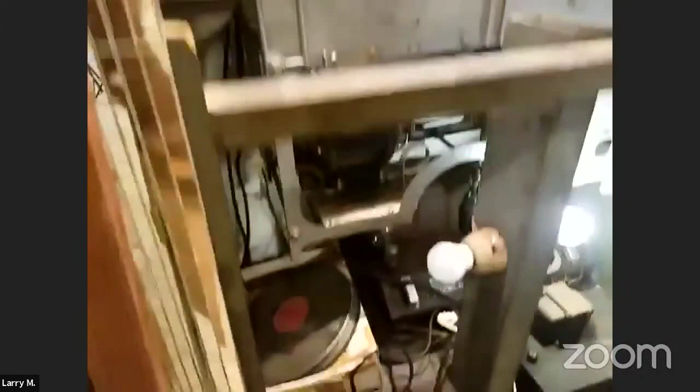All right, let's move down to the Dumont RA 101 Custom. This is an interesting set, very expensive. Comes in 3 parts: a speaker, a control chassis with the tuner and so forth, and the CRT, and it was designed to be mounted in the wall of your living room. Obviously there had to be a closet there to get in to repair it, because in 1946 sets broke down all the time. I think the set cost over $2,000 at the time.

Okay, let's move on to the next row. Other end, Larry. I might have a page missing here. Okay, well I'll direct you. Go down to the U.S. television set. Oh, okay, never mind. Here we go, gotcha.

Now, this again is the era around 1946, 47. Again, before many people had sets in their homes, but restaurants and bars and clubs, many of them had these projection sets in them. This takes the cake for the ugliest set in our collection.

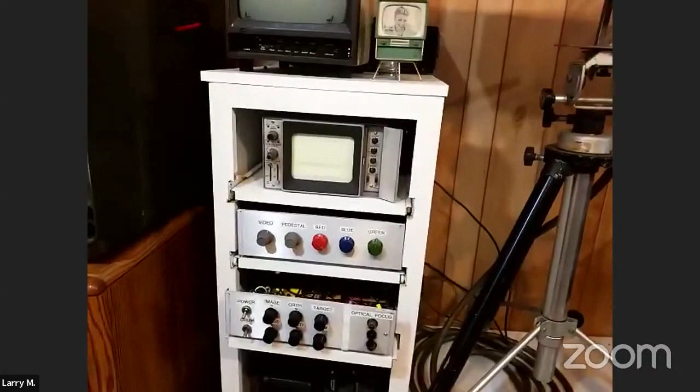We built a camera control unit for it. It also operates, and during the conventions we demonstrate - people are able to stand in front of it and see themselves on field sequential TV. We have a number of other field sequential artifacts too, but let's move down.

Next I want to show you the RCA prototype.

RCA, after the CBS system in 1950, starting around then, RCA started working on its compatible system, and there were several iterations of their design. This one is about a 1952 version of what they were trying to do.

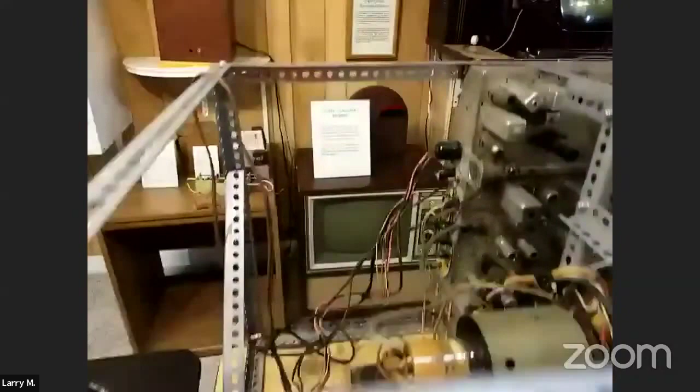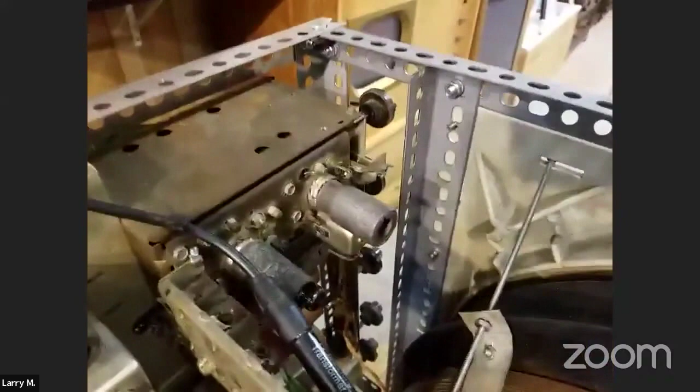This chassis was loaned to the museum by Nick Williams. He bought it on eBay, got it to the museum, and we restored it. Darryl Hock, who you'll see later, builds standards converters, and he was able to, from the documentation we had, build a standards converter that produced a signal for this. It's not the same as the NTSC system that we used - it was, as I said, an interim system. It actually produces pretty decent pictures. But by the end of 1953, RCA had moved on to their system that became the NTSC system.

Now let's go down to the CT100. The CT100, of course, is the set RCA produced in 1954, about 4,000 of them. There were several other manufacturers that made similar sets using a 15-inch picture tube. These sets produced a pretty nice picture too.

All right, let's move on - we're heading actually into the British and European room, but we sort of ran out of room in the color area. So in here is a very rare Raytheon set.

We know of only one other that exists. There's a chassis also that exists, but this set was donated by a person in Chicago. It was owned by an engineer at Raytheon. Steve Kissinger and Darryl restored this thing, and at the last convention they demonstrated it working. There's the back of it - it's a monstrosity, has an upper chassis and a lower chassis. This uses the same 15-inch picture tube made by RCA.

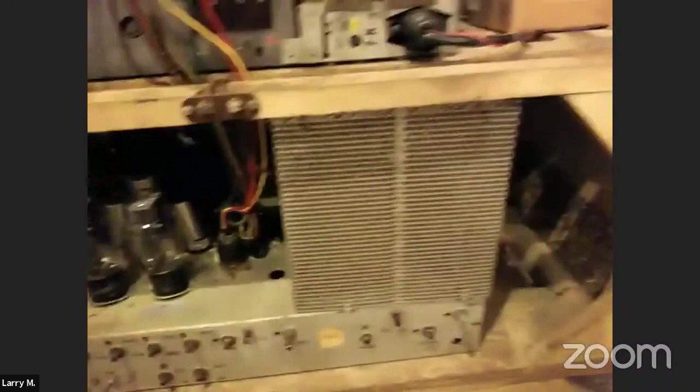Now I'm going to show you a couple of European sets that are sort of interesting. We have a bunch of them on display. One of them is this really fancy Dynatron Ether Sovereign that has a phonograph and a TV set. This is from the late 40s - really a magnificent cabinet, of course a top-of-the-line set.

And then finally, the set that is probably the most popular with visitors is our Kuba Komet. This was made at the end of the 50s and beginning of the 60s in Germany. This is probably around a 1962 model because of the screen. Interestingly, as fancy as this cabinet is - you'd think the audio section would be really fancy because it's got half a dozen speakers, but it's actually very bare bones. We haven't restored this, but I would imagine the sound is not terribly impressive.

All right, let's move back toward the broadcast equipment room.

Here are a bunch more of the color sets we have on display. And on the right-hand side up here, you'll see our picture tube collection. We have all kinds of strange and unusual picture tubes, many of them donated by Dave Johnson, a collector who passed away a few years ago.

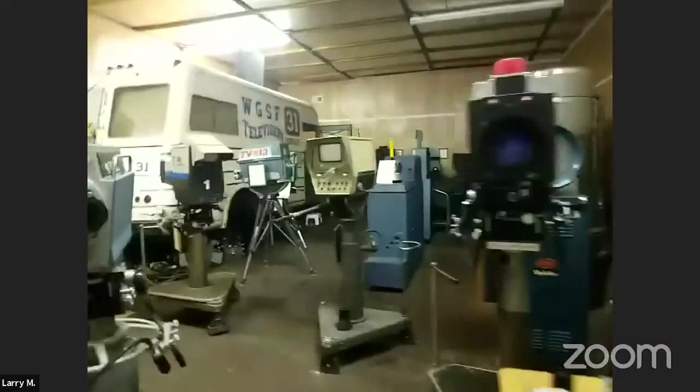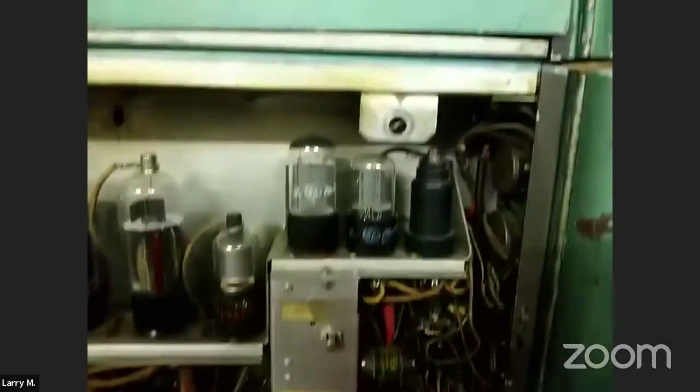Now we're entering our broadcast equipment room. I'm not going to go through everything here because there's just so much, but we have all kinds of cameras and other equipment. Here's an RCA TK31, which was sort of the workhorse of the television industry from 1946 on into the 50s. We also have a TK41 color camera, the first commercially produced color camera, but it's now being restored.

The other thing I'm going to show you in this room is our mobile van. Larry, if you could back up and try to get a shot of this. That's a pretty good shot.

This was sold by RCA to a number of TV stations, I'm guessing around 50, in 1949. This particular one was in Salt Lake City and was bought in the 60s, when the Salt Lake station upgraded, by a local educational station in Newark, Ohio. They drove it out here at a top speed of about 55 miles an hour and used it for several years for local production, doing football games, parades, and things like that in Newark, a fairly small city about 50 miles east of Columbus.

Larry, why don't you peek inside? You can see it has most of its original equipment. It had a microwave system for beaming the signal back to the television transmitter. You can see it's a pretty basic machine to drive. Toward the back end, it has the original control panel with 3 chairs: one for the audio guy, one for the video guy, and one for the director.

That concludes our brief tour. For those of you who have never visited the museum, it gives you an idea of what we've got. For those who have visited, it might be sort of nostalgic to see it. So I thank you for listening, and I'm wondering if you have any questions.

Yeah, I've got one for Darryl Hock. Darryl, could you give a brief overview as to how the RCA prototype set differed from what NTSC evolved to be?

That set was CPA — they realized that NTSC, or what would become NTSC, was going to have problems with phase errors. Hazeltine knew that PAL was the right way to go, but there was no way to produce a delay line at the time. So this was color phase alternation, where they reversed the colors just like in PAL, only on a field-by-field basis instead of line-by-line. You get the advantages of PAL, no need for a hue control, but you do get some artifacts — color fringing and flickering — because of the lower overall rate of the color alternation. I forget, I think the subcarrier was around 2.2 megahertz, if maybe Steve remembers. It was a totally different frequency they were using.

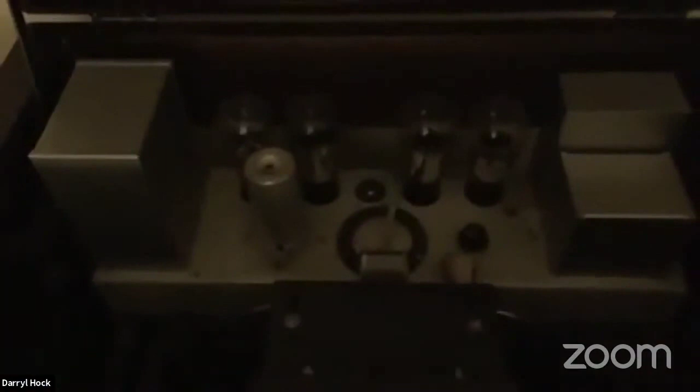So this is a fairly elaborate setup. This is the amplifier section for the neon lamp, and you can't see there's a very large GE motor in there that you'll hear when it fires up. It's loud, and then a shortwave radio chassis all the way at the bottom.

This is a repurposed RE45 phonograph cabinet from Victor that they basically just reused. If you look back here, this is where the radio originally was, and the phonograph was sitting up here. They actually just filled the holes for the original lid support and basically pulled cabinets off the line and used them for this purpose.

So let me grab the video source here. Unfortunately, I don't have it feeding around like Steve does. So let me...

Okay, you got quite a few of those converters there, Darryl. You must have gotten a good deal on them, huh? I do have quite a few converters. I don't have one on every set, so I got to carry one around a little bit tonight.

But let me get some different content for this. So now this set is running. Let me turn that off so we don't have to listen to the tone. This set is running, you can see the orange dot right now, and you'll see it fire it up.

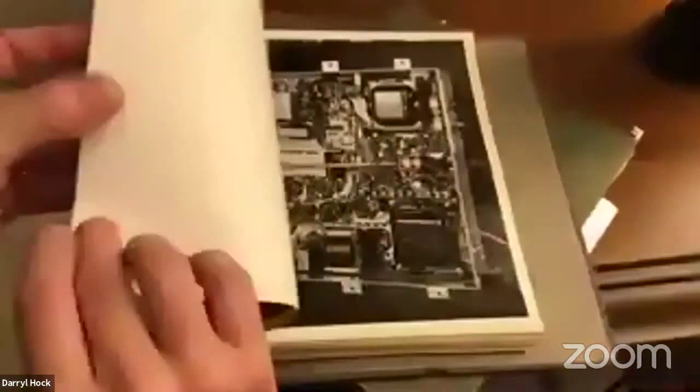Now there are some pictures in here. These are all the R359s. This is the 366, the tabletop 5-inch version, which has never surfaced, but obviously at least one was made. Let's keep going here - different 5-inch sets, power supply for the 359.

Is this one of them? Yeah, so this now is a Russian set. You can see the same Cyrillic writing. So this is one of the sets that they had made to go over to Moscow.

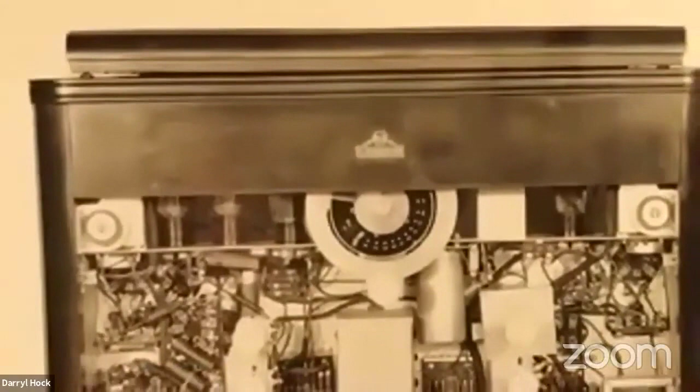All these now are the Russian set. Now it's interesting, this one actually has the meatball in Russian, if it'll focus there on it. Now the set I have didn't have that on it, and I debated putting it on, but I left it original.

I thought that would be kind of neat to have the Russian RCA meatball on there. So just lots of different flavors of the 359 sets that they had made - the 9-inch, and we'll see a 12-inch here in a second. The power supplies, different cabinets, different lid configurations.

The tabletop 366 again - in the data sheet, or the technical sheet on this one, they complained that it was getting way too hot in the cabinet and something would have to be done in production. And you can see it's crammed in there pretty tight.

And I think in here he has some of the earlier, getting back into the earlier 30s sets. A lot of these sets, at least I've never seen any of them ever surface. This is some 5-inch set.

This is an earlier 5-inch tabletop set. This was actually 1940, I believe. They were doing how low cost of a set can we make? And they actually made a version of this in a plywood cabinet that's just hideous, to really cheapen it up. But they were trying to see if they could hit a $200 price point at the time.

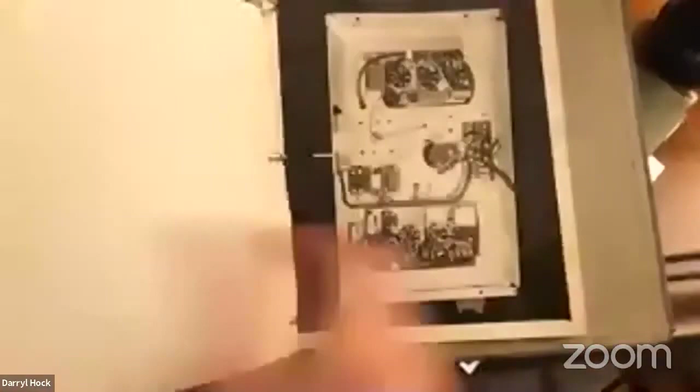So now, again, there's a couple other different - let's see if we can find a picture of a different one. This one was interesting, it's a 3-chassis set that the CRT went down through a hole through all the chassis, and there you can see it. So it goes down - oh sorry, 2 - it goes down through the chassis, and again, that's another one that's nowhere to be found. Obviously these though were made in very low volume, probably just for a 1-off, 2-off for an engineering sample.

So then over here, this is an R359B. Get this back down a little. So what they did, that was a 9-inch. The R359A was a 9-inch. They pulled them back and turned them into 12-inch sets. So they did that - it's all the same chassis. They just took the chassis out, repurposed them. They had to put a different assembly in to hold the CRT.

And you can see on this set, this is a little bit later 359B. Some of the early ones you still had all 7 user controls. This is a little bit later - they folded the width and centering on each side down inside, so they're actually underneath the deck board, because they figured that really wasn't going to need to be a user adjustable item. The other one had a continuous tuner; this one has a detent tuner in it now. So just slight changes that they made along the way.

The interesting thing about this set is this was the master set that was used to drive the sets at the World's Fair. One of the things with these early sets - there's no RF amplifier on them, so the local oscillator is basically spraying out the antenna terminals. And it's really difficult - there were quite a few service articles you can read in the magazines of the time where a guy would go out for a customer complaint about interference, and it turned out it was his next door neighbor, and the antennas were basically radiating into each other.

So what they did is they just basically created another detector and then put it through a transformer and out the back. The cans they're using are probably about 3-inch diameter and about 4 inches tall, and they screwed them to the bottom of the chassis, the two of them, just to do the modifications, and then put the extra holes in.

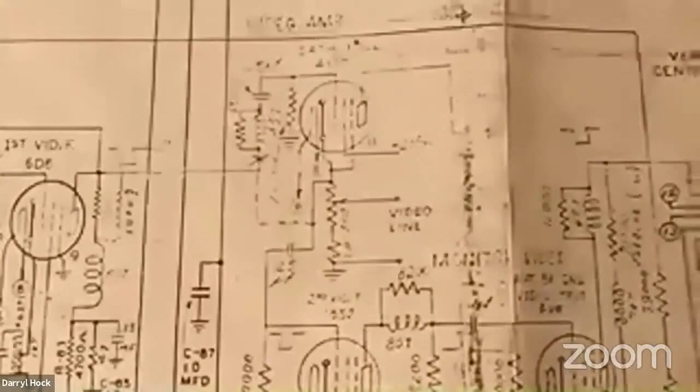So now this is where, if you get the original 359 schematic, the original circuitry is here, and they just pasted this over it. What they did is put—again, this is the preliminary 6AG7 as a cathode follower—and created the video line output to the sets. So this control is actually under the front service panel so they could set the level.

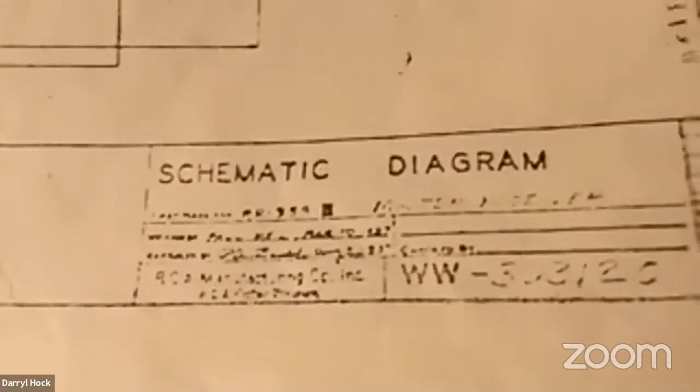So, kind of an interesting set. It's getting pretty hard—let's see if you can see it. So, master receiver, if you can see the name of it. Kind of an interesting backstory on that one. Back in the tripod.

And last, the '31 set. Some of you may know this, some may not. Again, it was found by an RCA engineer in Indianapolis. He had been working there a few years and heard about a warehouse that was getting cleaned out in Indianapolis. He went over there and saw this set laying on its side with a big piece of tape on top that said 'scrap.' All the tubes were missing out of it except the CRT, which is a prototype CRT from '31.

So he went to his bosses and said, you guys need to save this or do something with it, or just don't throw it out. Basically at the time, nobody had any interest in it. So he grabbed it, and it's survived till today.

This set was fairly well documented in a series of IRE papers, because this is the first electronic set that actually made it out of the lab by RCA. There were a couple of sets before this one I can show you pictures of in a bit, but this is the one that made it out and actually went to field testing. So they wrote some IRE papers on it, discussing every aspect of it, the transmitter, the receiver, doing field test measurements, interference measurements at people's houses where they were located, and basically just getting a lot of information on the set. It's 120 line, 24 frame.

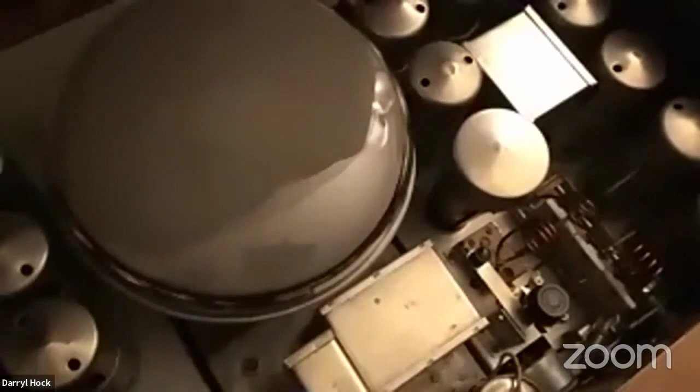No safety glass, so they weren't quite as worried about it, I guess, at that time. Easy access, since you obviously had to be playing with it quite a bit. The construction is all 1929, 1930 RCA and Victor. These cans are real typical in all the RCA Victor radios, the standard transformer cans. Some of it is unique, obviously, like the tuner section, the audio, because it's two separate. So this is the sound receiver.

This is the video receiver. There's no common IF between them, so what they did is make them completely separate. This one runs about 40 to 60 megahertz, and this one runs about 50 to 70 megahertz. They just kept them far enough spaced apart so they didn't even have to worry about interference at first.

The set runs on a single power supply. Well, obviously there's the high voltage for the CRT, but the set runs on a single 1,000 volt power supply. The reason they had to do that is, even though the horizontal scan frequency is only about 2.8 kilohertz, because of the inductances they were working with, they needed a high voltage to get the sweep they needed. So they needed 1,000 volts.

So why not use it to run the whole set by using 100-watt resistors to drop the voltage to the typical 230 volts for the rest of the chassis. So the set's filled with giant power resistors just giving off heat when you run it. It's all 2.5 volt AC tubes, except for two 10s in it. Just an interesting point, it's 54 amps to run the filaments of all the tubes on it at the 2.5 volts.

So let's go now. One of the things that the set used, and for some reason, I guess I can get into that.

Back in the summer of 2014, somebody had contacted Steve with some documentation that he had, and asked what he thought of it. Steve sent it to me, and it was a partial schematic of the prototype before this set. It used gas thyratrons for the line and frame oscillators. For some reason, this set uses Dynatron oscillators, which are horrible oscillators.

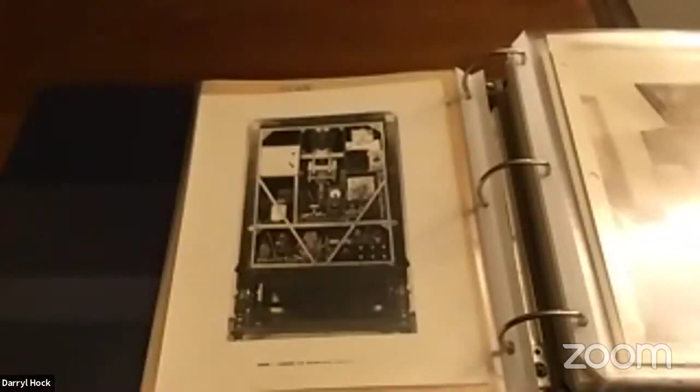So here, here's some of this, one of the prototypes that precedes this set. It's probably a little hard to tell, but some of these are very crudely put together. They were thrown together, and you'll see a picture like this one here. You can see they just used, Steve, that CPA set you look at, it's not much different than what they were doing back then, just putting something together using rack material.

But they did a demonstration in 1929. So this was all the mechanical sets. They lined them all up, a GE Octagon. Some of these I don't recognize, I don't know if they were one-offs or internal projects or whatever. So they lined up all the electronics, the mechanical sets, same thing. And then electronic set, more mechanical, the Octagon.

There's the RE45, the NBC RCA one from earlier. This almost looks like the prototype for this set, where they did it from the earlier work that Zworykin had done, but I don't recognize exactly where that one came from. And then a picture of them with their lids open.

So he was doing these presentations basically for the brass at GE or at RCA, showing them here's where we're at, here's what we're doing. It doesn't sound like these electronic sets were ever actually that functional.

They were more just laboratory curiosities that they were trying different things with. There's the one of the photocell cabinets.

Talking with his son-in-law, he was prolific at photography, a real photography buff. He had all sorts of 16 millimeter movies that I'm like, what happened to those? Unfortunately his son-in-law couldn't remember. He thinks he gave some away and threw some out. This was back in 2015, and his son-in-law and daughter were very old and in ill health at the time, which is why they were trying to sell these documents.

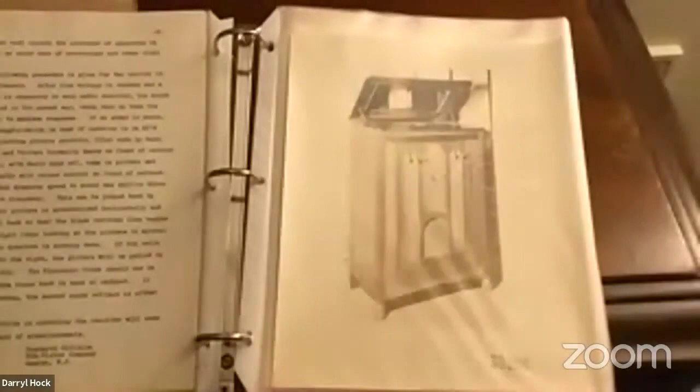Picture of the set. Again, there's no nomenclature, no markings on the set of what knob does what. But he had pictures and he labeled them all, what all the controls do on the front and on the back.

So here is the sound chassis and sound radio output. There's a switch on there marked speaker and fax. So he was, like I say, really into facsimile even while he was doing the television development. He thought, well, heck, I can use this receiver chassis to do my facsimile work.

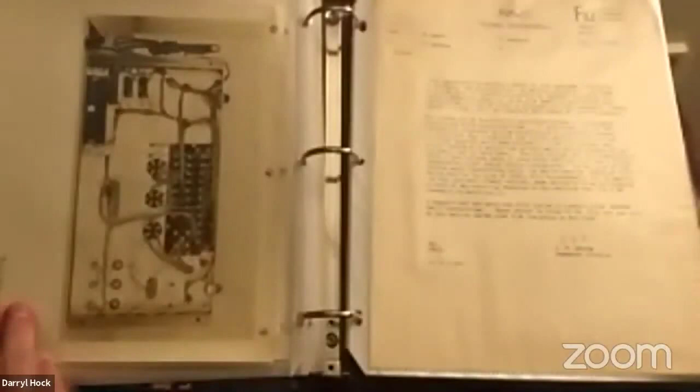And pictures of the power supplies. Just lots of correspondence between him, Engstrom, Zworykin, Kell, suppliers as he was getting looking for parts. Where are the resistors I ordered on such and such a date?

And another thing he did, now this is the thing where, like I said, we always assumed that it was a '32 trial. In '31, he was running a trial out of Camden. So he did these sheets, which were basically any change notices that were going along. And then the engineers had a little reader's response thing that they would fill out and tell them they liked this, didn't like that, what was working, what wasn't. Then in October of '31, on the last one, I think it was Bulletin 15, he said, okay, next week you're losing your set because I'm collecting them all, because they got to get them retrofitted to go up to NBC field test. So that was the one that happened in '32.

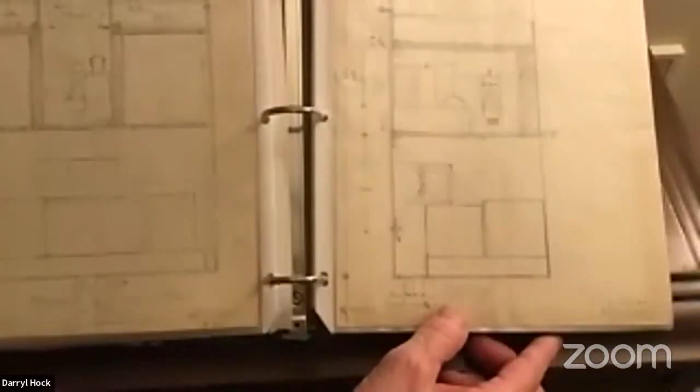These are interesting, his hand drawing in April of '31 of this set and how the chassis are going to lay out in the cabinet with dimensions, both from the front and side view. So he figured exactly how everything was going to fit and what the basic layout was going to be. And they kept right to that.

Again, lots of work orders, engineering, hand-drawn for the different deflection and amplifier. It's just amazing that this stuff was still around someplace.

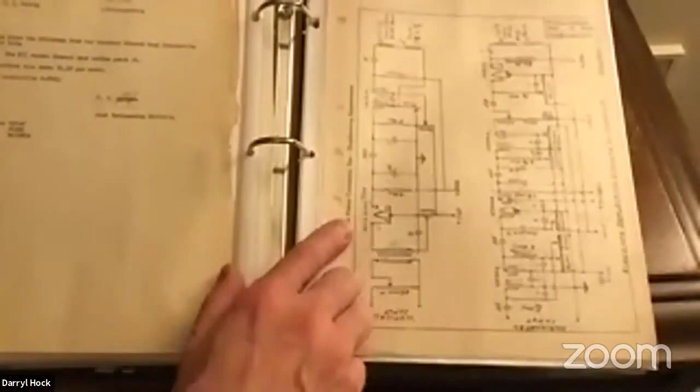Now, this is the schematic that he had originally, David's son-in-law had originally sent Steve and that I saw. And it's like, wow, that's 1930. This is the one before this set. It's the same deflection units, but they use gas thyratrons instead of the dynatrons. So that's what started this whole thing out, is when he showed us that.

And then these are actually the drawings that were used then. If you look at the IRE papers, this was the drawings that they used in the IRE papers, that he just drew out to show basically, without specifically labeling anything, how it all went together. And then more engineering and just different notes.

So again, just quite the stroke of luck that this stuff still existed, didn't get thrown out, and ended up back with the set. And the fact that it was one of his sets. So that's kind of it.